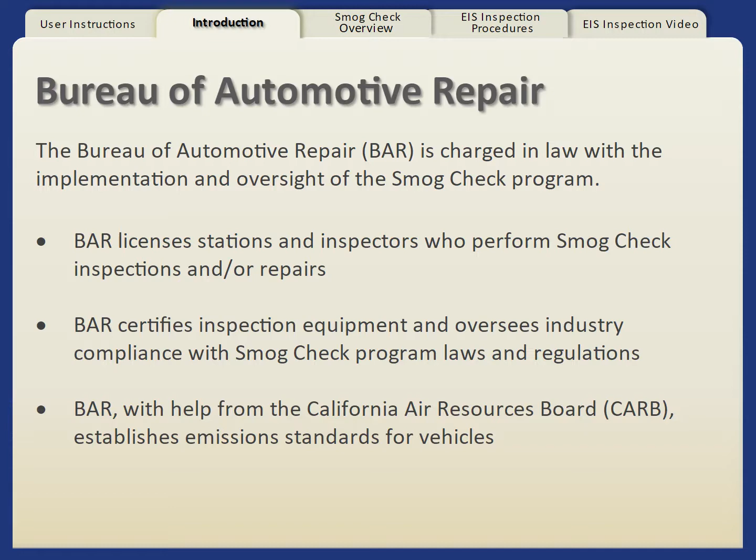BAR establishes emissions standards, also known as pass-fail cut points, for vehicles. The Smog Check program has greatly reduced the amount of air pollution created by tens of millions of cars in California.

According to the Air Resources Board, the program removes approximately 400 tons of smog-forming pollutants from California's air every day. The word smog is derived from two words, smoke and fog.

Smog is generally produced from vehicular and industrial emissions. Photochemical smog is the result of the chemical reaction of sunlight, nitrogen oxides, and volatile organic compounds in the atmosphere and results in poor air quality.

Ozone is formed by hydrocarbons, which is raw fuel from a vehicle tailpipe or fuel tank leakage, and nitrogen oxides, which are contained in vehicle tailpipe emissions undergoing a chemical reaction aided by the sun.

Ozone can irritate the respiratory system by aggravating asthma, inflaming and damaging the lining of the lungs, and reducing lung functions. Ozone is also known to aggravate chronic lung diseases, such as emphysema and bronchitis.

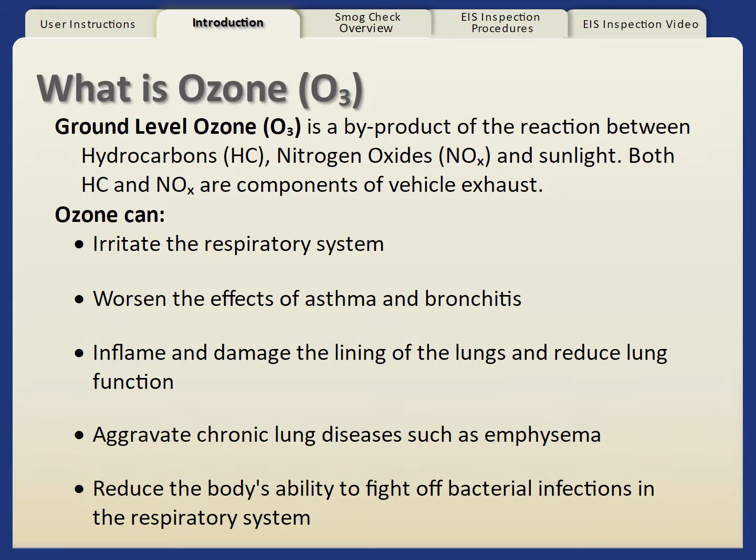Studies suggest that ozone may also reduce the body's ability to fight off bacterial infections in the respiratory system. Despite significant success in reducing overall pollution levels, air monitoring shows that over 90% of Californians breathe unhealthy levels of one or more air pollutants during some part of the year.

Health-based ambient air quality standards set by the Air Resources Board identify outdoor pollutant levels that are considered safe for the public, including those most at risk from exposure to air pollution, such as children, the elderly, and people who are active outdoors.

In setting air quality standards, the Air Resources Board has identified certain air pollutants as toxic air contaminants. Long-term exposure to toxins may have serious effects, such as cancer, even when exposure is low.

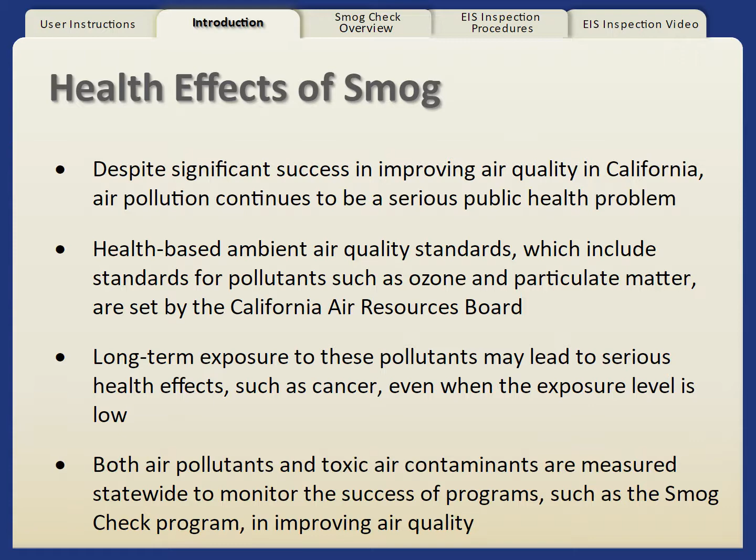Both traditional pollutants and toxic air contaminants are measured statewide to assess the success of programs for improving air quality. While there are numerous and varied contributors to California's air pollution, nearly half is from motor vehicles.

Hydrocarbon emissions from a vehicle come from unburned fuel. High levels of hydrocarbon emissions indicate incomplete combustion, which can be the result of low engine compression. If high enough, this could result in a failed smog check inspection.

Carbon monoxide is a colorless, odorless gas that is fatal to many life forms in moderate concentrations. Carbon monoxide emissions are often the byproduct of an overly rich fuel mixture. Unhealthy levels of carbon monoxide emissions result in a vehicle failing its smog check inspection.

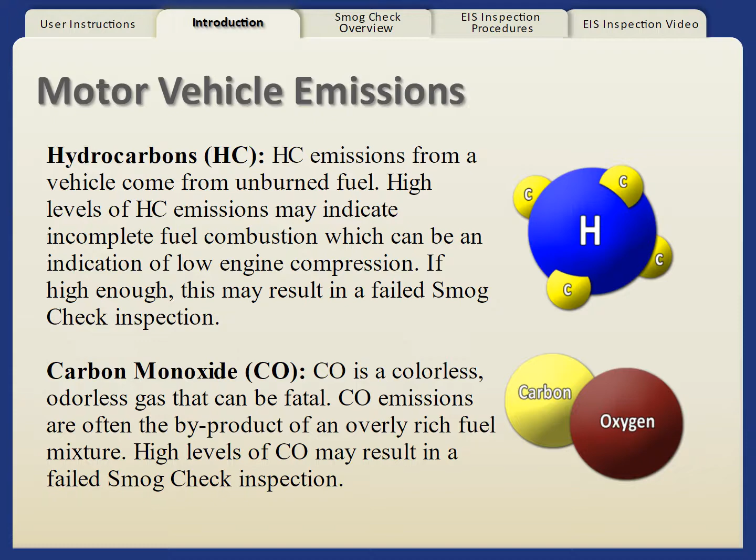Nitrogen oxides is an odorless gas that helps create smog, giving smog its characteristic brown color. Nitrogen oxide is produced when the temperature in the combustion chamber exceeds 2,500 degrees.

Excessive combustion chamber temperature could be caused by a lean mixture, advanced ignition timing, carbon buildup, a malfunctioning exhaust gas recirculation system, or a malfunctioning coolant system. High levels of nitrogen oxide emissions result in a vehicle failing its smog check inspection.

This section discusses the requirements of the Smog Check program. Here is a list of topics that will be covered: vehicles subject to Smog Check program, Smog Check program areas,

when is a smog check required, licensed inspector requirements, licensed station requirements, smog check station types, and inspection requirements by program area.

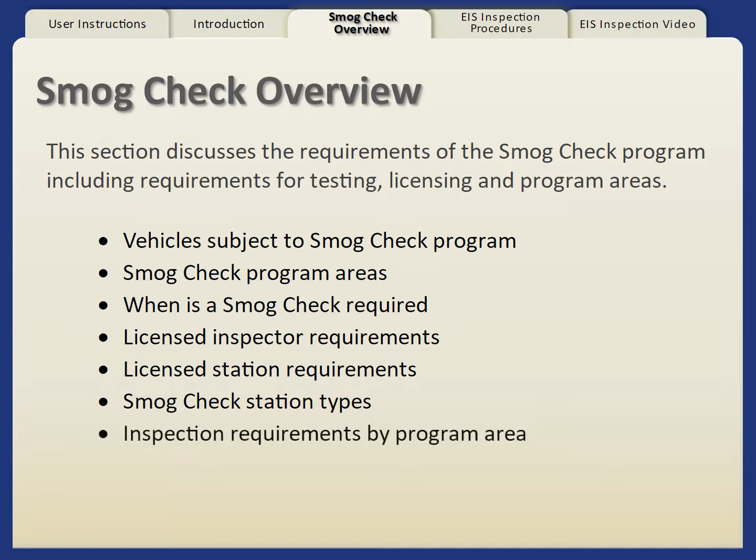Vehicles subject to the smog check program include gasoline vehicles 1976 and newer. This includes alternative fueled vehicles under 14,000 pounds, diesel vehicles 1998 and newer under 14,000 pounds, and hybrid vehicles 2000 and newer.

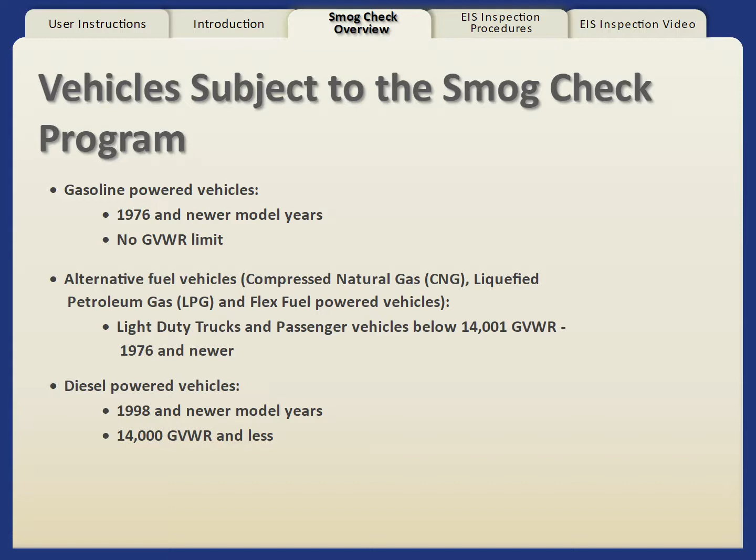The Smog Check program divides California into three areas. Vehicles registered in enhanced areas must receive an applicable BAR OBD inspection system test, also known as a BAR OIS test, or an acceleration simulation mode or ASM smog check, unless the vehicle is not compatible.

Also, a portion of the vehicles in these areas are required to pass a smog check inspection and obtain a certification from a STAR Test and Repair or STAR Test Only station.

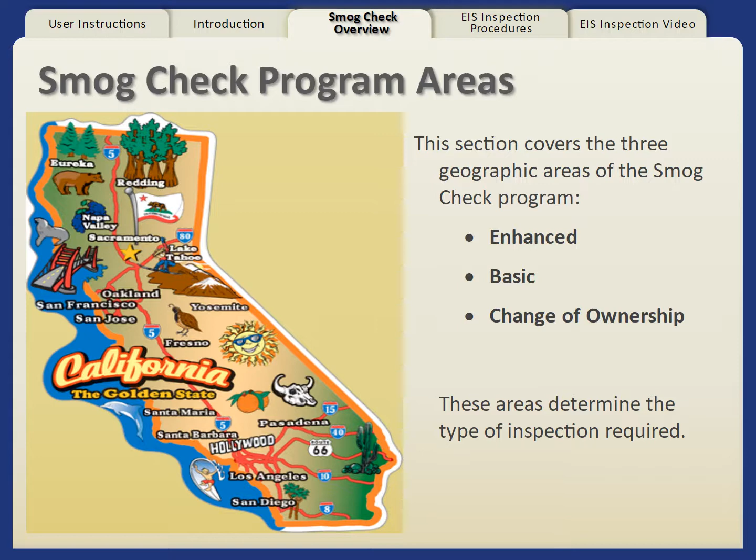Vehicles registered in basic or change of ownership areas must receive an applicable BAR OIS test or two-speed idle smog check. Vehicles in enhanced and basic areas are required to be smogged every other year as part of their registration

renewal for vehicles that are 8 model years or older. Keep in mind that the 8 model year exemption does not apply to diesel-powered vehicles.

Upon change of ownership of vehicles that are more than 4 model years old, keep in mind that the 4 model year change of ownership exemption does not apply to diesel-powered vehicles, and upon initial registration of a vehicle in California.

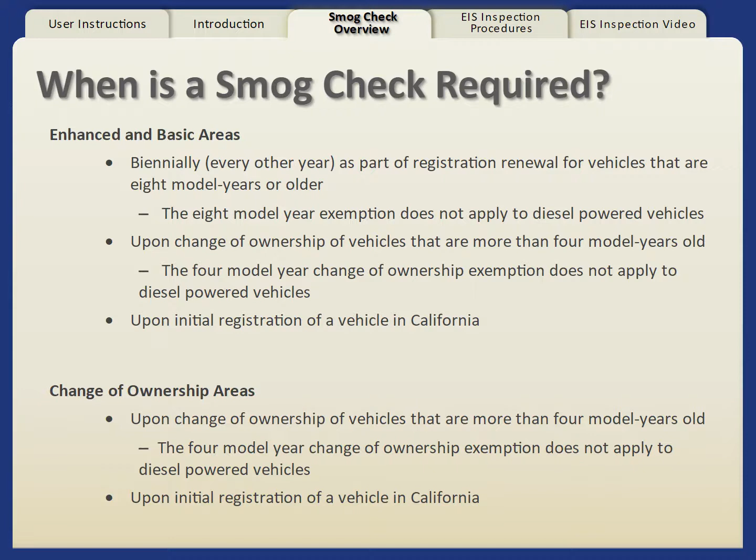In change of ownership areas, you are required to smog your vehicle upon change of ownership if that vehicle is more than 4 model years old. Keep in mind that the 4 model year change of ownership exemption does not apply to diesel-powered vehicles, as well as upon initial registration of a vehicle into California.

To become a licensed smog check inspector, the candidate must meet certain experience and training requirements and pass a BAR licensing examination. Licenses must be renewed every 2 years. Maintaining a current license requires successful completion of a BAR-approved continuing education class.

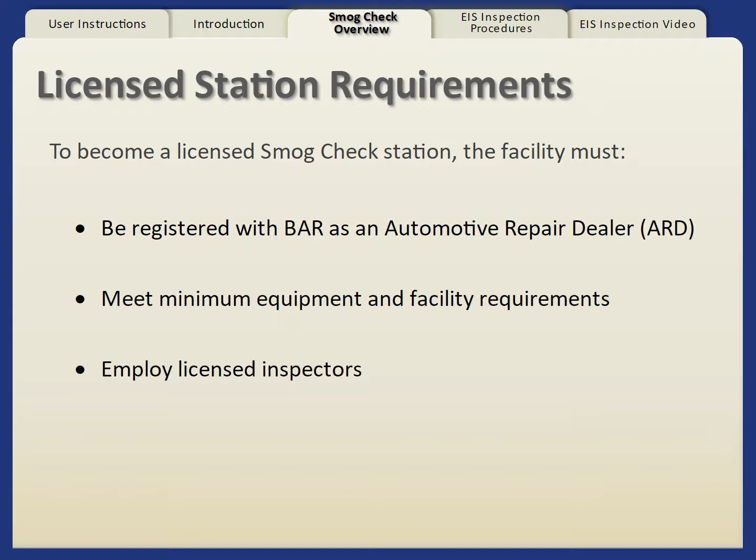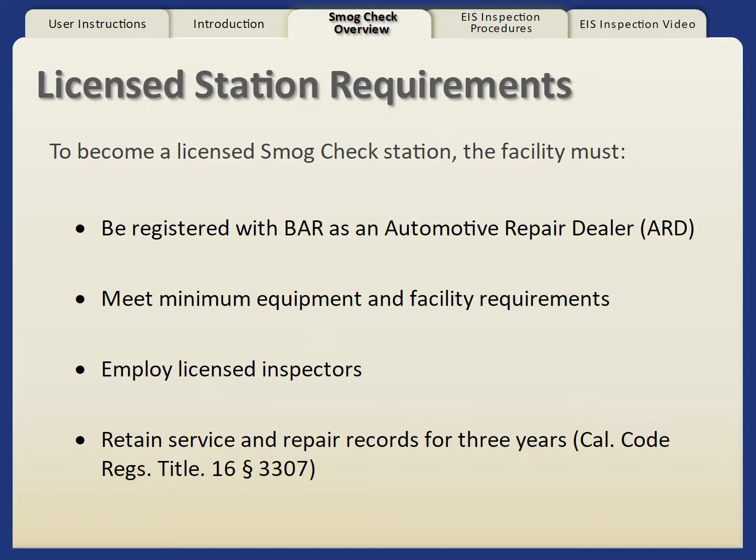To become a licensed smog check facility, the station must first be registered with BAR as an automotive repair dealer. The station must also meet minimum equipment and facility requirements while employing licensed smog check inspectors. The station must also keep necessary service and repair records for a minimum of 3 years, in accordance with Title 16, California Code of Regulations, Section 3307.

Test-only stations are licensed by BAR to test vehicles. They cannot perform any repairs. Directed vehicles and gross polluters must be certified by a STAR Test Only or STAR Test and Repair station. STAR Test and Repair stations that have met certain performance criteria will be able to test and certify all vehicles, including directed vehicles and gross polluters. They also perform repair assistance services under BAR's Consumer Assistance Program, or CAP.

Repair-only stations are licensed to perform diagnosis and repairs on most vehicles. They cannot perform any smog check tests.

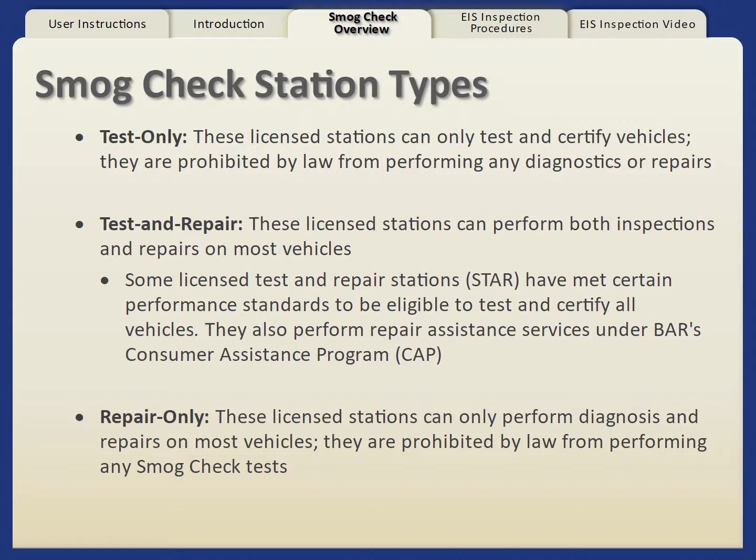In enhanced areas, most vehicles are required to be certified every 2 years during their DMV registration renewal process. Upon change of ownership or initial registration in California, all vehicles more than 4 years old are required to obtain a smog check inspection. A portion of vehicles in enhanced areas are required to obtain a smog check certificate from a STAR Test Only or STAR Test and Repair station.

Vehicles registered in enhanced areas must receive an applicable BAR OBD inspection system test, also known as a BAR OIS test, or an emissions test using a dynamometer, unless the vehicle cannot be tested on this equipment. Exceptions include all-wheel drive vehicles and those with non-disengageable traction control.

In basic areas, vehicles are required to be certified every 2 years during their DMV registration renewal process, and on change of ownership and upon initial registration in California. Vehicles registered in a basic area are not required to have an emissions test on a dynamometer. Instead, these vehicles are given an applicable BAR OIS test or two-speed idle emissions test.

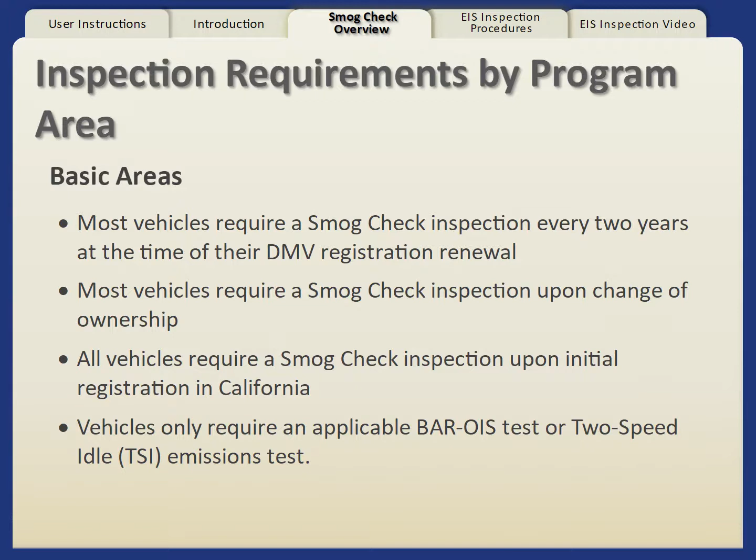In change of ownership areas, vehicles are required to be certified only upon change of ownership or on initial registration in California. Vehicles registered in a change of ownership area receive an applicable BAR OIS test or two-speed idle emissions test.

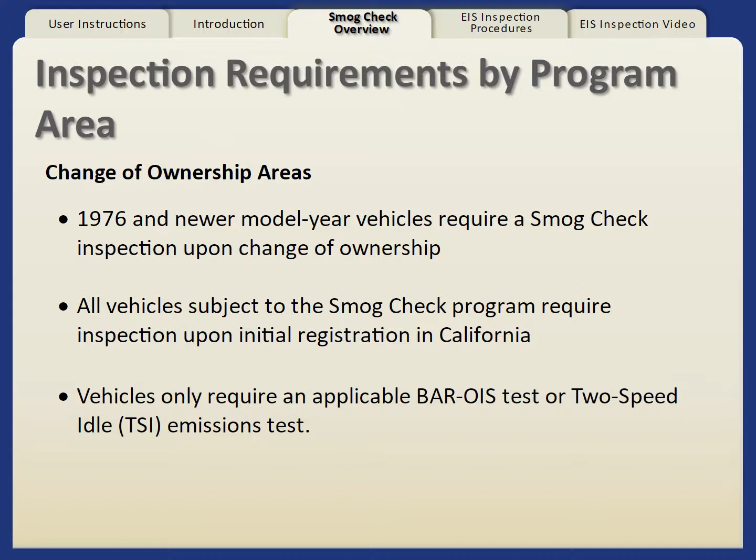The remainder of this training module will cover the smog check inspection process. Here is a list of topics that will be covered during this section: vehicle verification, smog check inspection elements, overview of smog check procedures, and reporting smog check results.

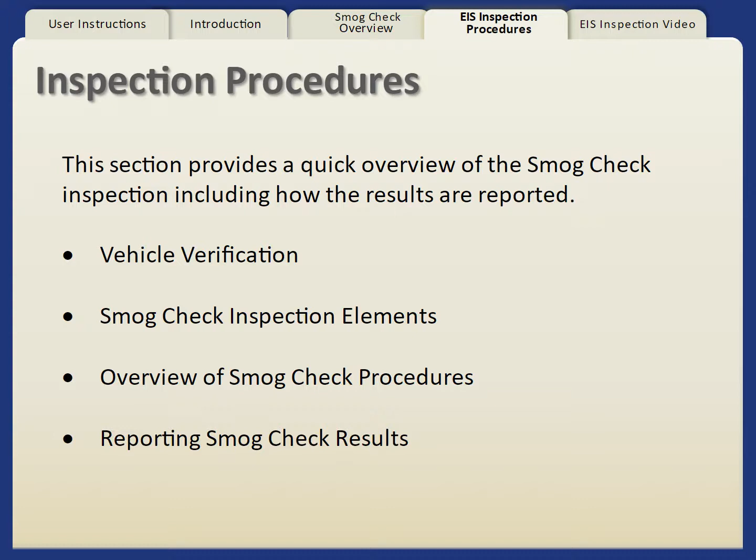A BAR licensed smog check inspector verifies that the vehicle matches the registration renewal form and scans the information into the inspection system. The inspection system communicates with the vehicle information database to determine if the station is authorized to inspect the vehicle. Using a barcode scanner, the DMV registration renewal form will automatically enter information about the vehicle into the inspection system. If the inspection is for change of ownership, or if the consumer forgets their renewal form, the inspector must manually enter the vehicle identification information into the inspection system.

After entering in specific license information and a confidential access code, the inspector proceeds to the test mode of the inspection system. The inspector manually enters the vehicle information, engine size, transmission type, etc., at the inspection system screen prompts.

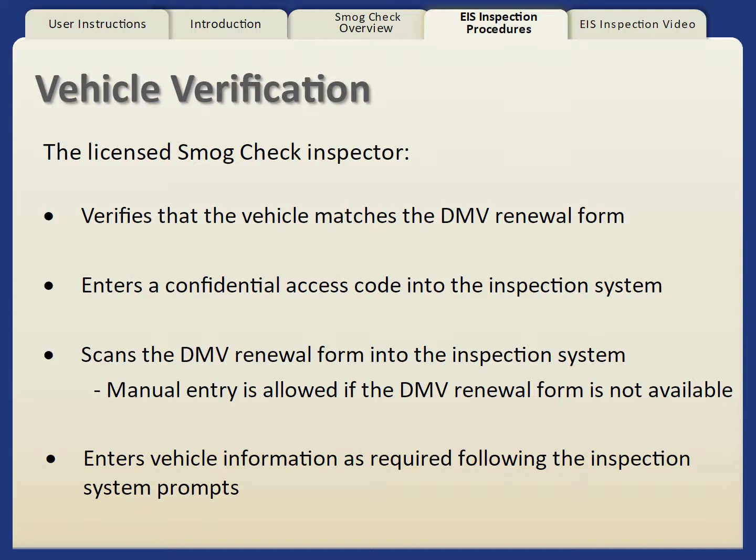The smog check inspection using the EIS is divided into three parts. The first part is a visual inspection, the second part is an emissions test, and the third is a functional test. Please note that these parts are the main components of a smog check inspection, but do not contain all information needed to conduct a smog check inspection. Please refer to the smog check manual for more specific information on inspection procedures.

The emissions inspection system reviews all data entered by the inspector and analyzes the tailpipe sampling results of the emissions test. Using electronically stored vehicle-specific parameters, the EIS determines if the vehicle passes or fails all required parts of the smog check inspection. The results of the test are transmitted to the state's vehicle information database.

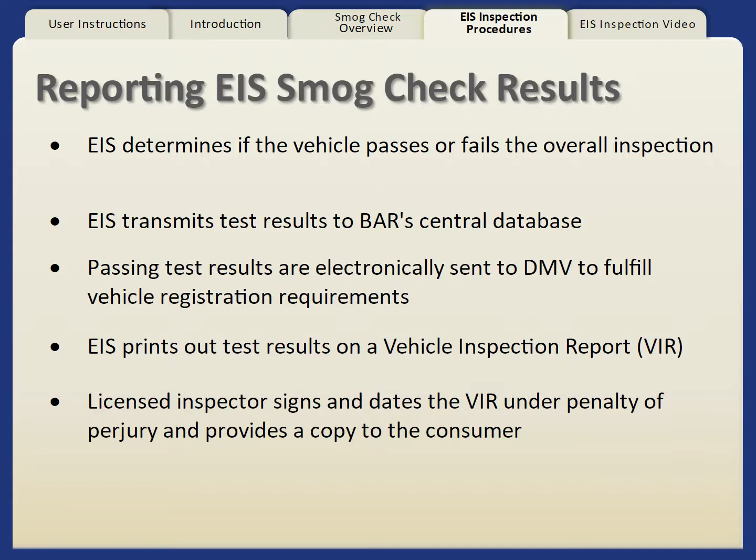If the vehicle passes the test, the results are electronically sent to the DMV to meet registration requirements. After each test, whether the vehicle passes or fails, the emissions inspection system prints out the entire set of results on a vehicle inspection report, or VIR. The licensed inspector is required to sign and date under penalty of perjury a statement on the VIR indicating that the test was performed correctly, and give a copy to the consumer.

This video is intended to provide a basic understanding of the procedures involved in conducting ASM smog check inspections using a BAR-97 Emissions Inspection System, or EIS.

For the full procedures on all smog check testing, refer to the latest version of the smog check manual, which can be obtained from BAR's website at www.smogcheck.ca.gov.

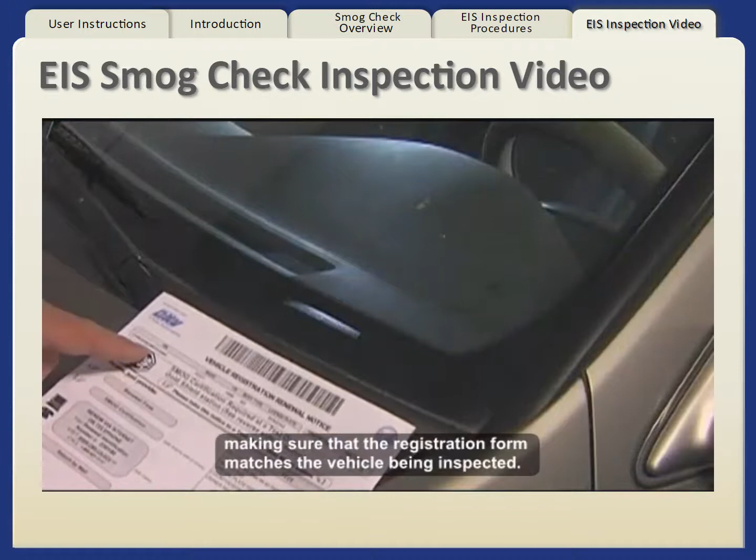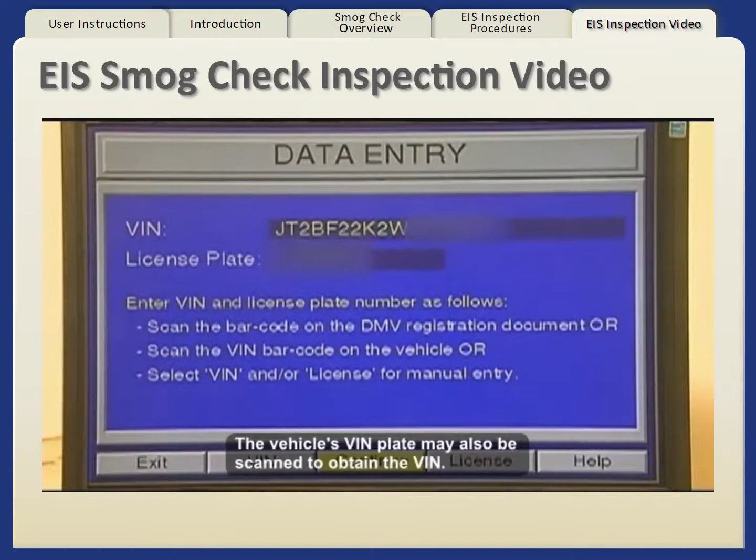The inspector begins by selecting smog check mode on the EIS. Inspectors must follow the EIS prompts to input all vehicle information. The inspector then uses the registration renewal form provided by the consumer to scan the vehicle information into the emissions analyzer, making sure that the registration form matches the vehicle being inspected. If no renewal form is provided, the inspector can manually enter the vehicle identification and license plate numbers. The vehicle's VIN plate may also be scanned to obtain the VIN.

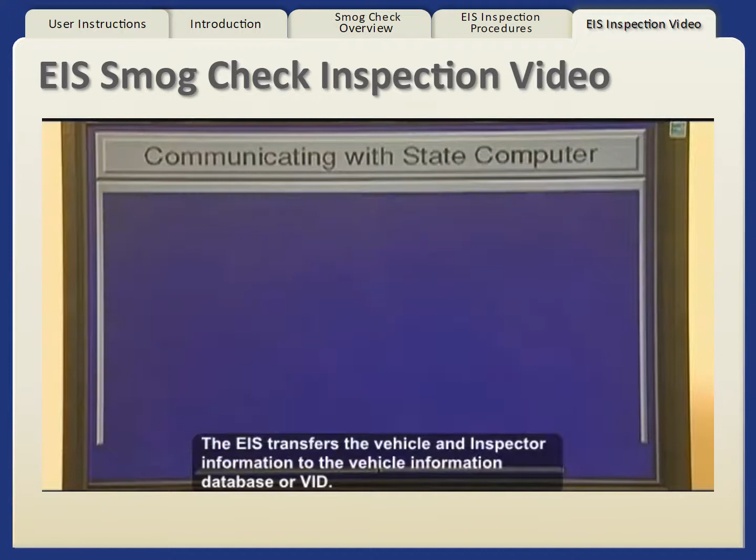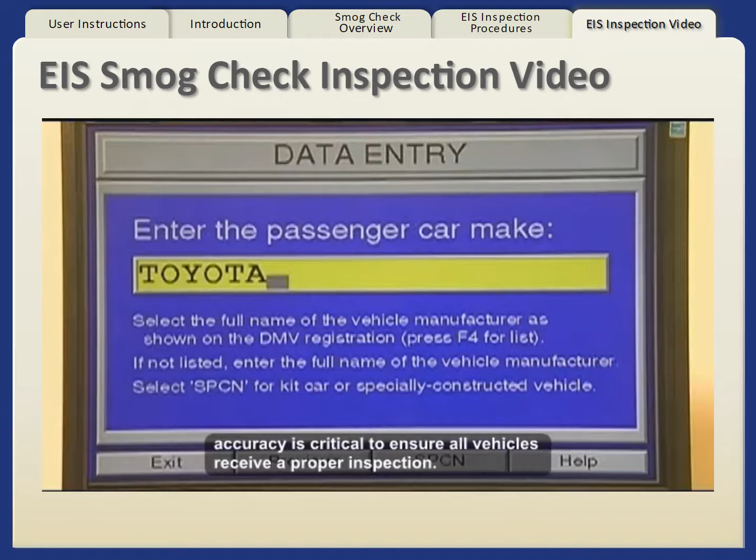The EIS transfers the vehicle and inspector information to the Vehicle Information Database, or VID. Entry of vehicle specifications is the next step in the process. During this step, as well as all other steps, accuracy is critical to ensure all vehicles receive a proper inspection.

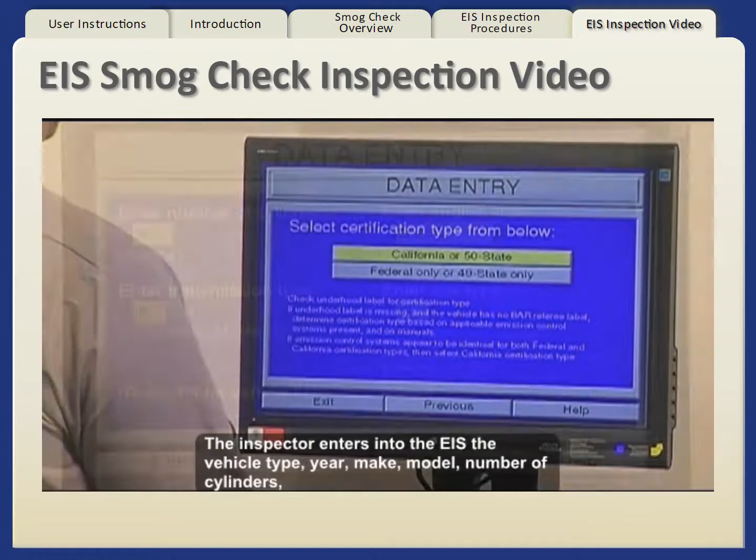Some data entered during the smog test cannot be re-entered, and if entered incorrectly, the smog test will have to be aborted and started again. It is unlawful for an inspector to enter information from a vehicle other than the one that is currently being tested. The inspector enters into the EIS the vehicle type, year, make, model, number of cylinders, fuel type, emissions certification type, transmission, odometer mileage, exhaust configuration, and gross vehicle weight rating for trucks.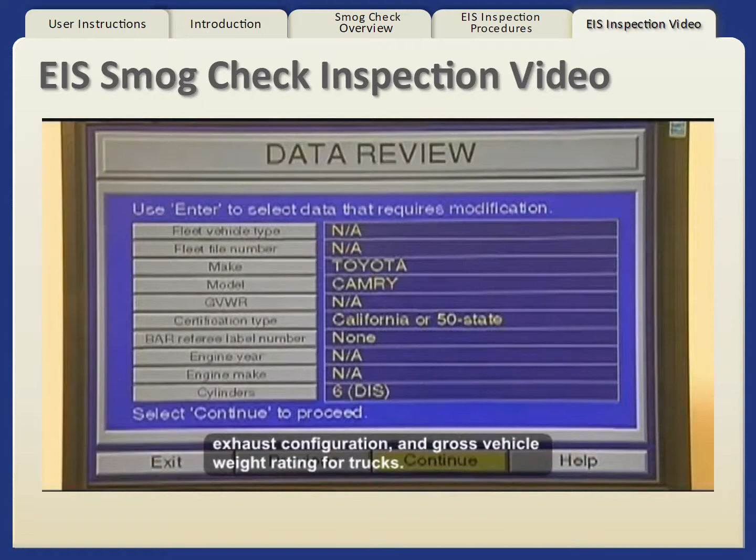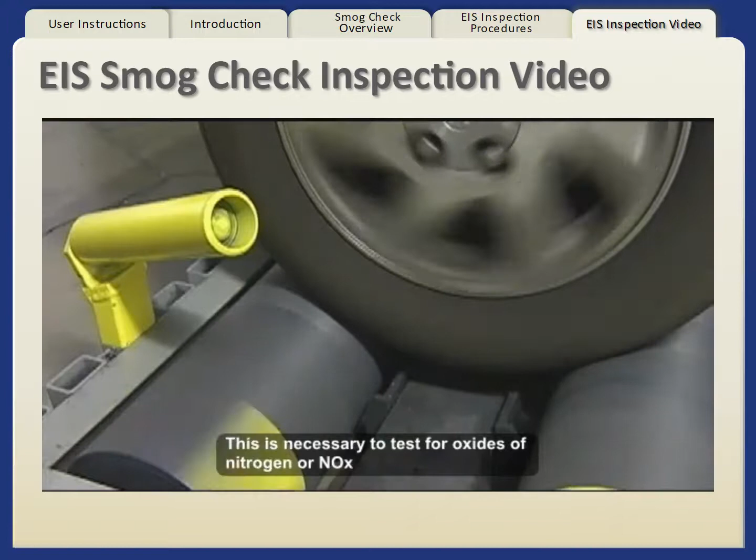The next step is preparing the vehicle for an acceleration simulation mode, or ASM, emissions test using a two-wheel drive dynamometer. The dynamometer simulates driving conditions by applying resistance to the wheels. This is necessary to test for oxides of nitrogen, or NOx, which is primarily produced when the vehicle is under a load. The inspector must follow the EIS prompts to determine if the vehicle can be tested on the dynamometer.

Be aware that some vehicles' designs are incompatible with a two-wheel drive dynamometer. Any attempt to operate such vehicles on a two-wheel dynamometer could cause damage to the vehicle or test equipment. Incompatible vehicles include, but are not limited to, vehicles equipped with non-disengageable traction control, full-time four-wheel drive, all-wheel drive, and vehicles that are too large or too heavy to be safely operated on a dynamometer.

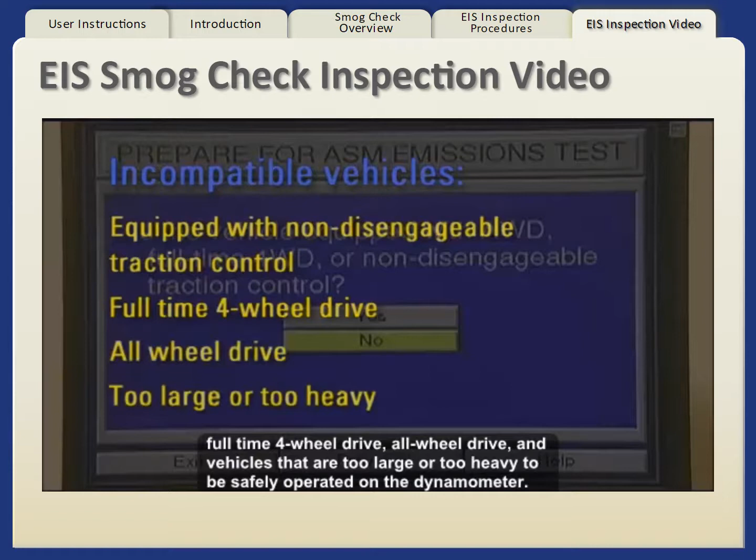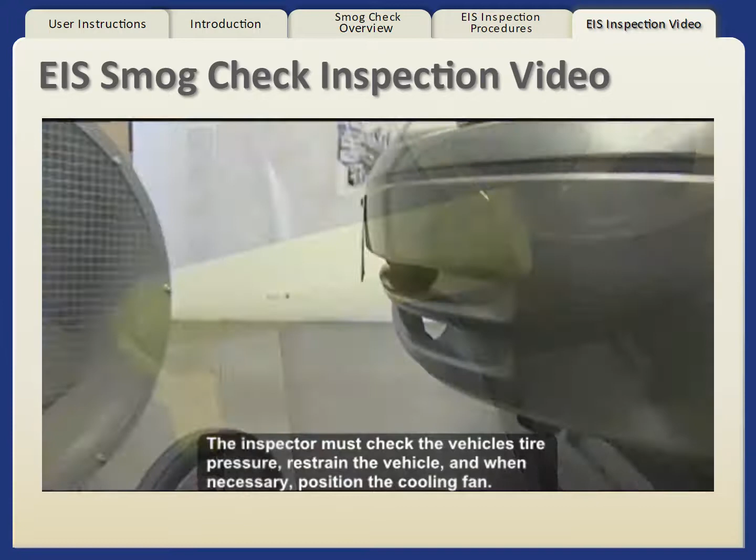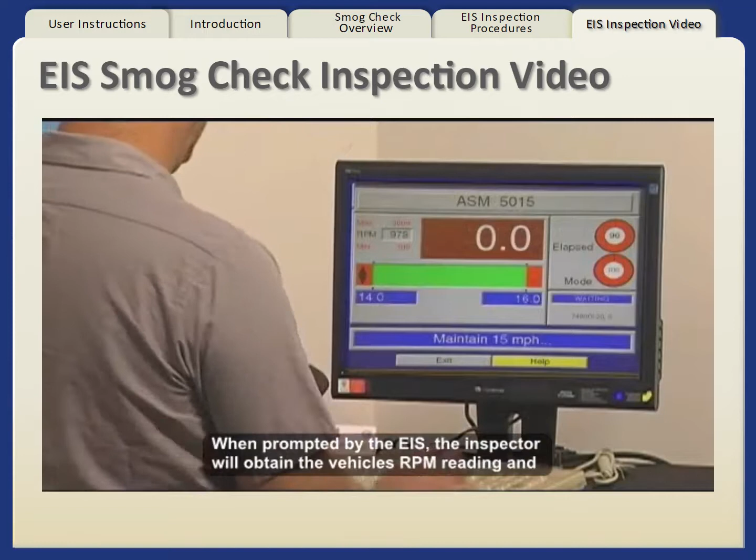The inspector must check the vehicle's tire pressure, restrain the vehicle, and when necessary, position the cooling fan. The cooling fan must be used when the ambient temperature reaches 72 degrees or above. When prompted by the EIS, the inspector will obtain the vehicle's RPM reading and insert the analyzer probe into the vehicle's tailpipe. While performing an ASM test, the inspector operates the vehicle at 15 miles per hour.

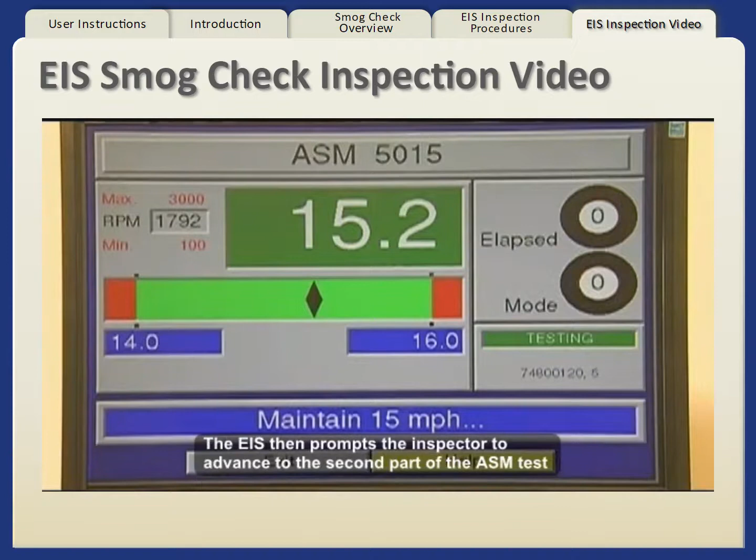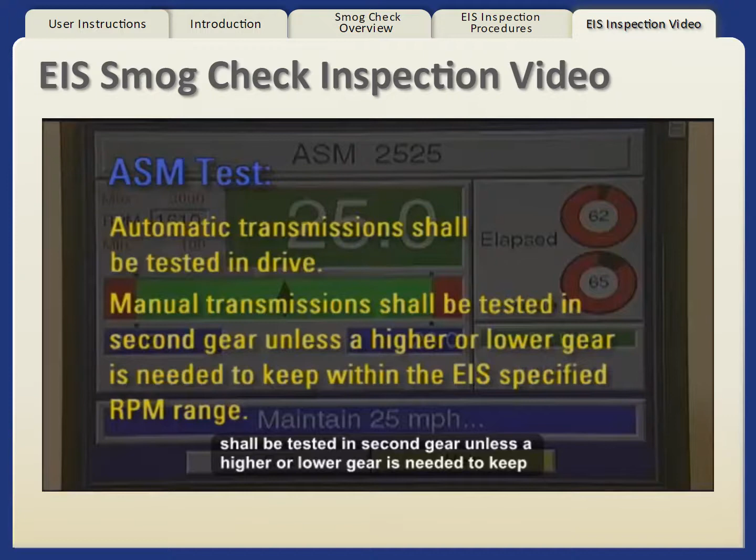The EIS then prompts the inspector to advance to the second part of the ASM test, in which the vehicle is operated at 25 miles per hour. The proper gear selection must be applied to receive the correct emission test results. Automatic transmission shall be tested in drive, and manual transmission shall be tested in second gear unless a higher or lower gear is needed to keep within the EIS specified RPM range.

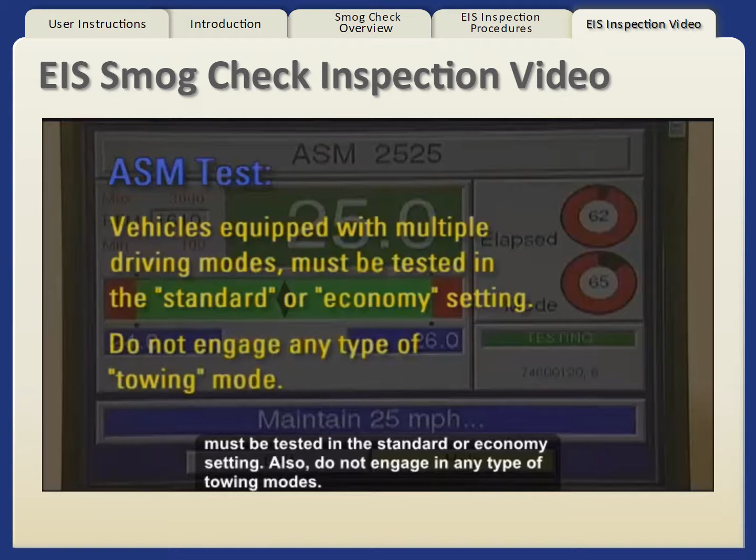Vehicles equipped with multiple driving modes, for example, low traction, performance, or sport, must be tested in the standard or economy setting. Also, do not engage any type of towing modes. Note that aborts which occur after beginning an ASM test can affect the station's star score.

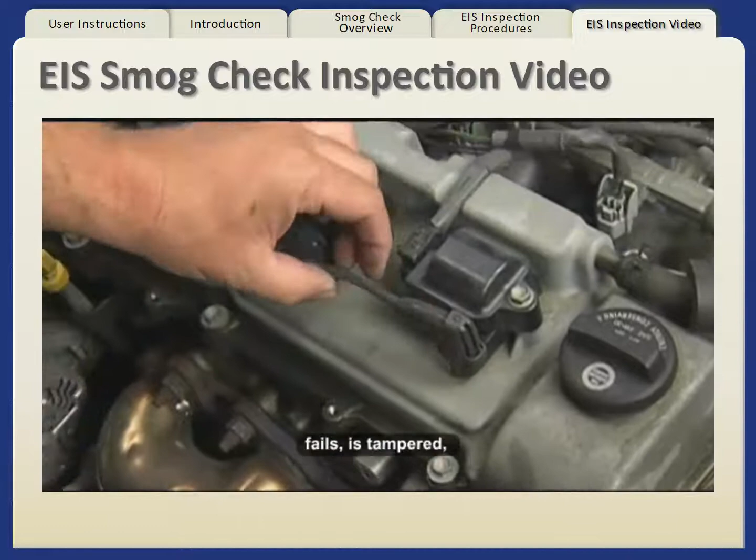During the visual inspection, the inspector identifies each emissions component required to be on the vehicle and makes sure that all components are properly connected. Refer to the Smog Check manual to determine if an emissions control component passes, fails, is tampered, missing, modified, disconnected, defective, non-applicable, or requires an executive order, or EO, from the California Air Resources Board.

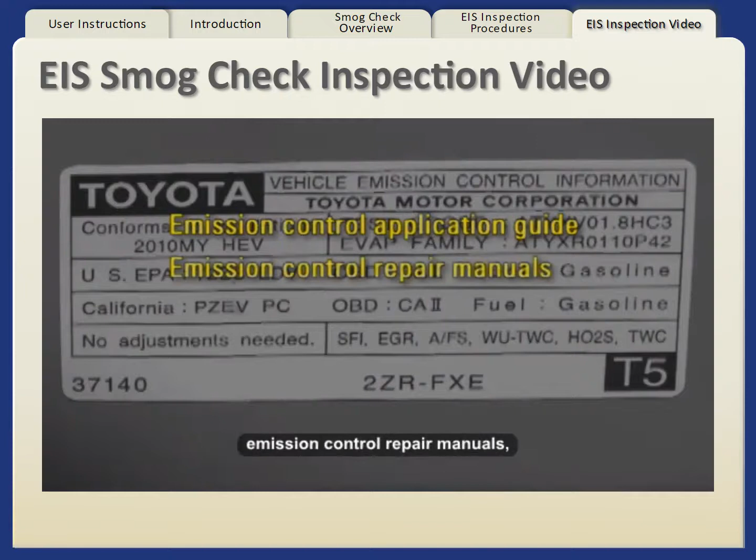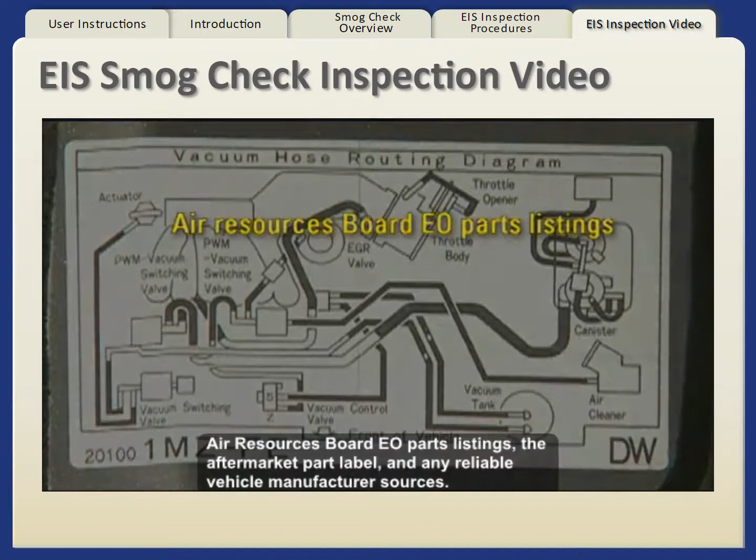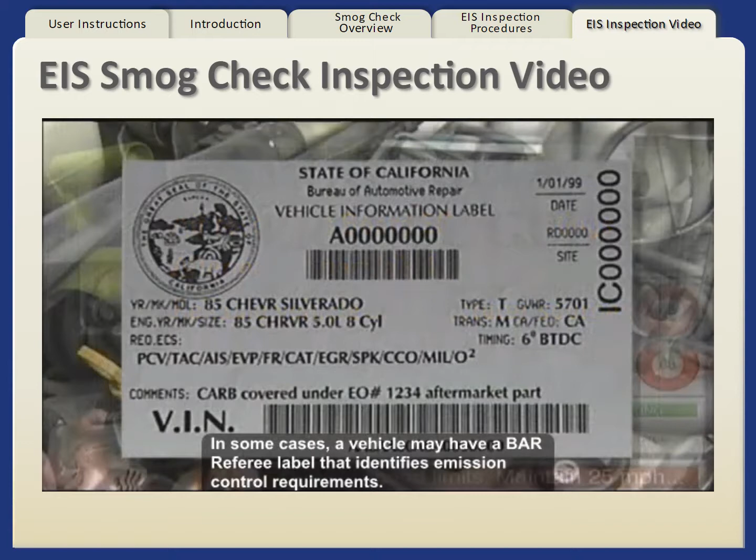Inspectors must use all available information necessary to determine the vehicle's emission control requirements, including but not limited to the underhood emission control label, a current emission control application guide, emission control repair manuals, emission component location guides, manufacturer emission control recalls, vacuum hose routing diagrams, Air Resources Board EO parts listings, the aftermarket part label, and any reliable vehicle manufacturer sources. In some cases, a vehicle may have a BAR Referee label that identifies emission control requirements.

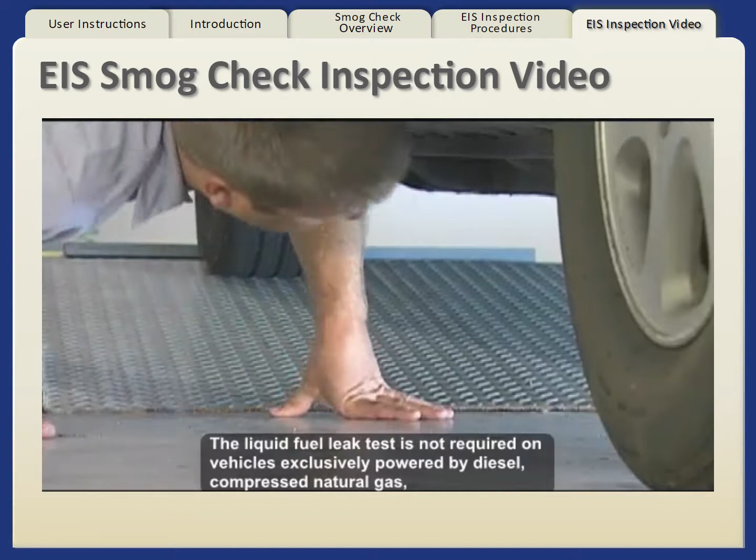The liquid fuel leak test is not required on vehicles exclusively powered by diesel, compressed natural gas, liquefied natural gas, or liquefied petroleum gas. The purpose of this inspection is to determine if there is fuel coming from the vehicle's fuel delivery, metering, or evaporation systems.

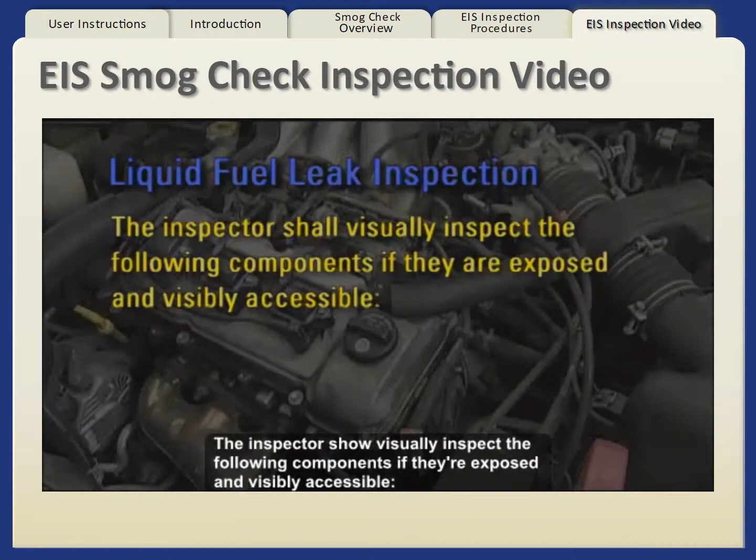A visible drop or puddle shall constitute a failure. The liquid fuel leak inspection shall be conducted with the engine running. Use extreme caution when working around moving parts and ensure the transmission is in park or neutral with the parking brake on.

The inspector shall visually inspect the following components if they are exposed and visibly accessible: gasoline fuel tanks, external fuel pumps, carburetors, charcoal canisters, fuel injectors, fuel delivery and return lines, gasoline fill pipes and associated hoses, tanks, connections, any valves connected to any other fuel evaporative component, fuel caps, fuel vapor hoses, fuel pressure regulators, and fuel filters.

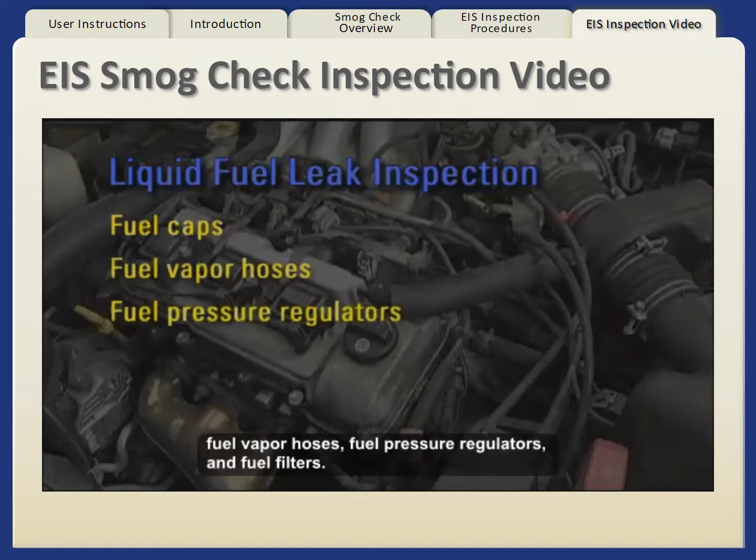An inspector may refuse to inspect a vehicle or may abort an inspection if a liquid fuel leak presents a safety hazard. If no liquid fuel leak is found, the vehicle shall pass this portion of the inspection, and the inspector shall enter P for pass at the fuel leak's prompt.

If a liquid fuel leak is detected, the inspector shall enter F for defective into the EIS fuel leaks prompt. Inspectors must indicate on the Vehicle Inspection Report, or VIR, the location of any liquid fuel leak.

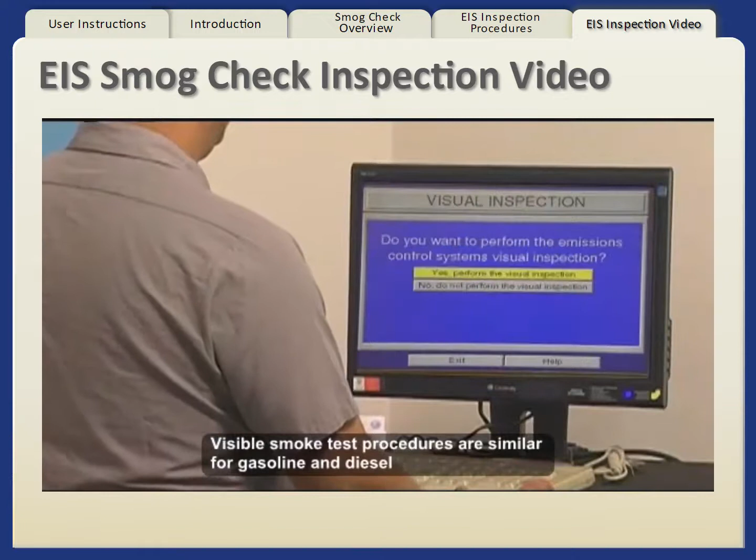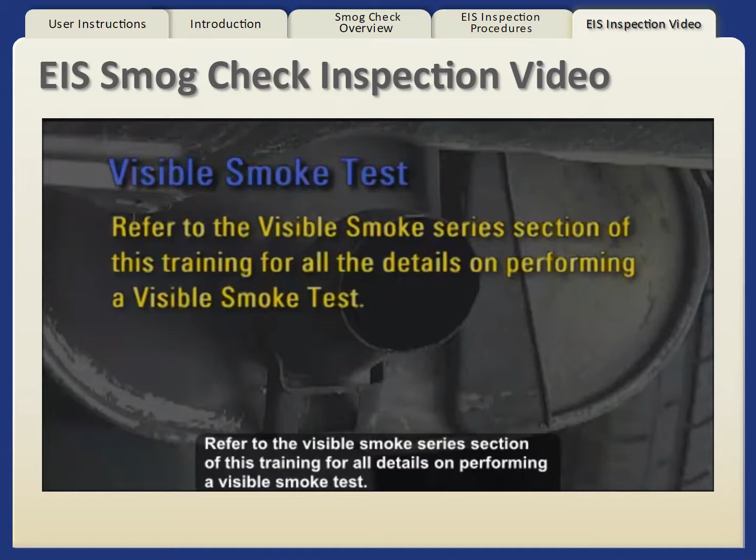Visible smoke test procedures are similar for gasoline and diesel, except when the bar snap tests are performed during the smog check inspection and the pass-fail standards are different. Refer to the Visible Smoke Series section of this training for all details on performing a visible smoke test.

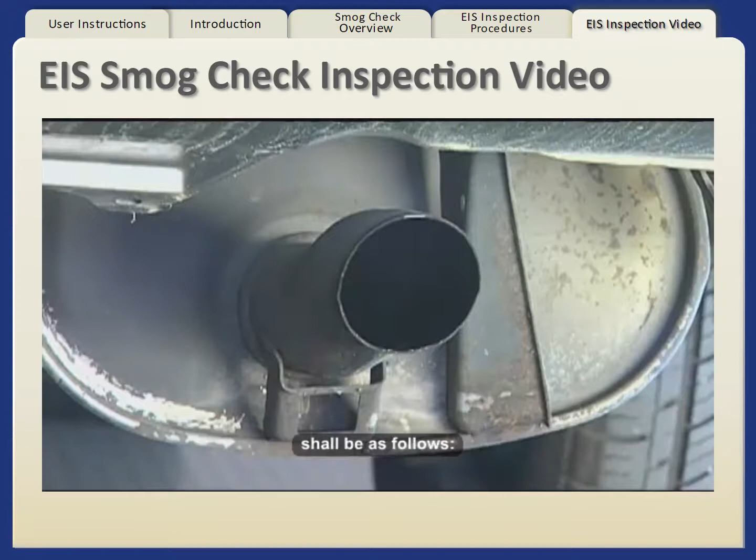The conditions and procedures for performing a visible smoke test for gasoline vehicles and recording the results shall be as follows. Idle test: observe the tailpipe exhaust plume of the vehicle for 10 seconds. Crankcase test: observe the engine crankcase for 10 seconds.

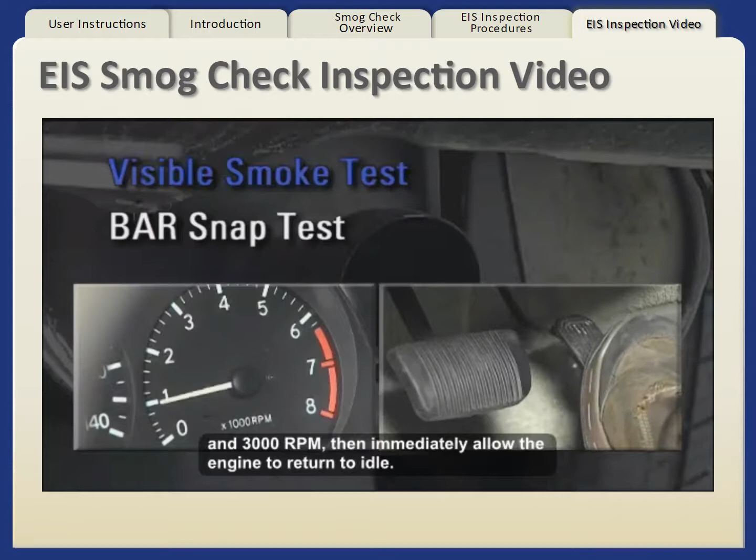Bar snap test: quickly push and release the accelerator pedal from the idle position to between 2,000 and 3,000 RPM, then immediately allow the engine to return to idle. Any smoke during either of the final two bar snap tests constitutes a failure. Steam shall not constitute a failure.

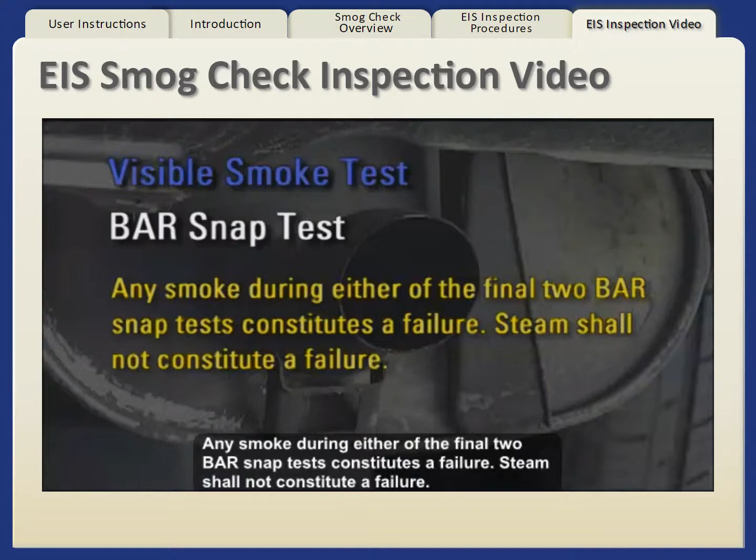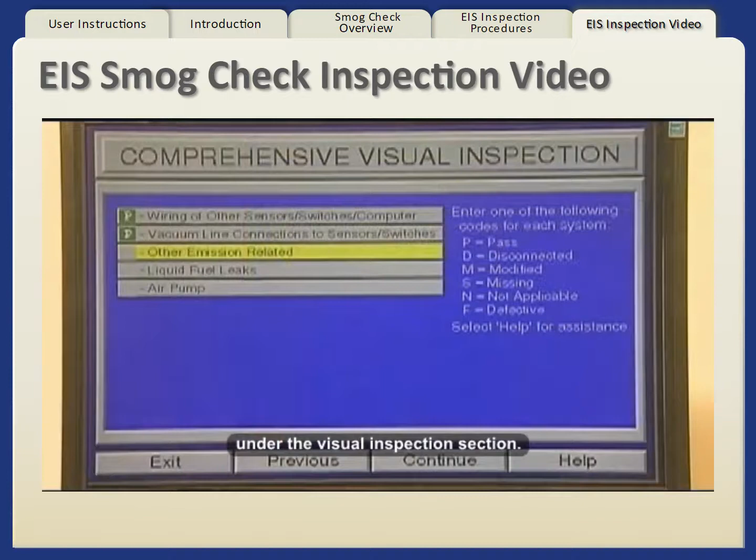Results must be entered into the EIS using the Other Emission-Related Controls category under the Visual Inspection section. If a vehicle fails any portion of the visible smoke test, enter F for defective into the EIS Other Emissions-Related category.

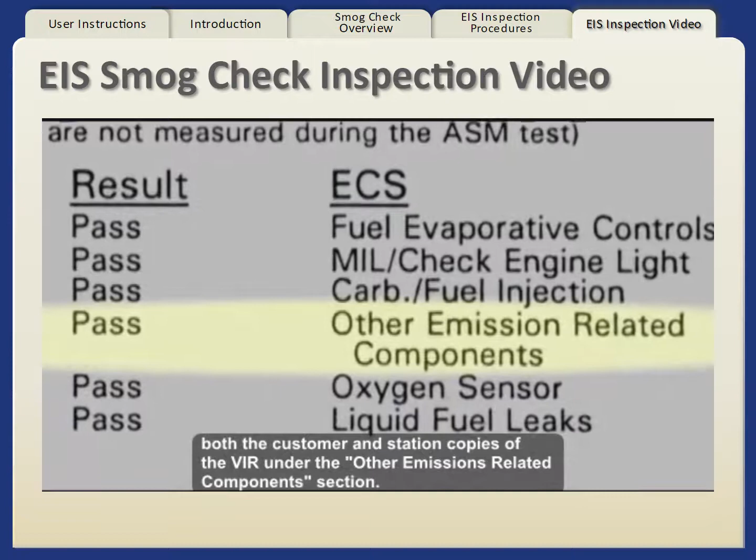If the vehicle fails the visible smoke test, the inspector shall document the failure on both the customer and station copies of the VIR under the Other Emissions-Related Components section. Clearly indicate the failure reason, such as failed visible smoke test or failed for visible smoke.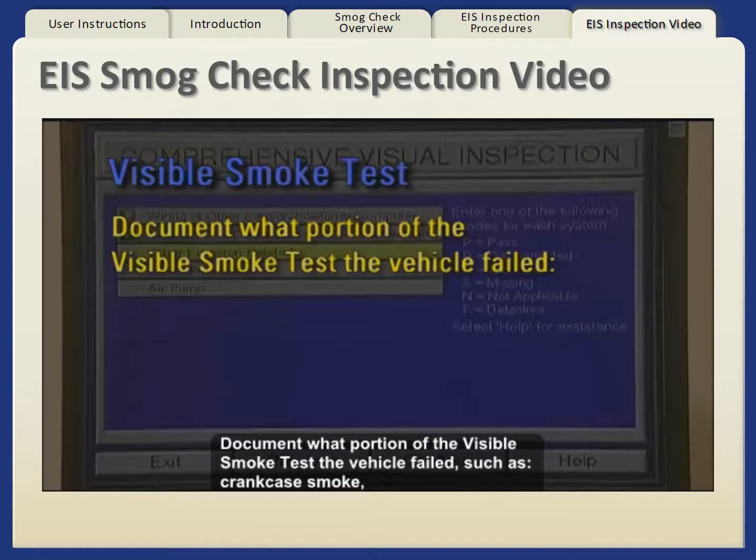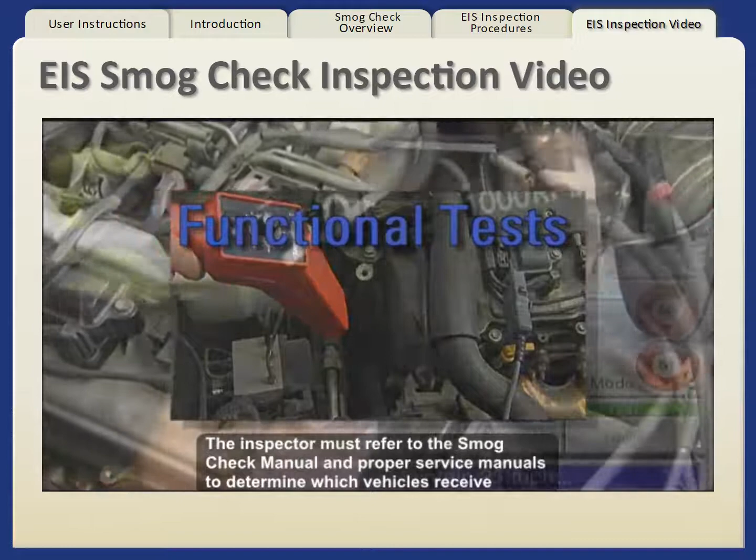Next, the inspector performs a series of functional tests that are applicable to the vehicle. The inspector must refer to the Smog Check Manual and proper service manuals to determine which vehicles receive certain tests and to properly complete the functional portion of the Smog Check inspection. Functional tests include ignition timing, malfunction indicator lamp, onboard diagnostics test, and the fuel cap pressure test.

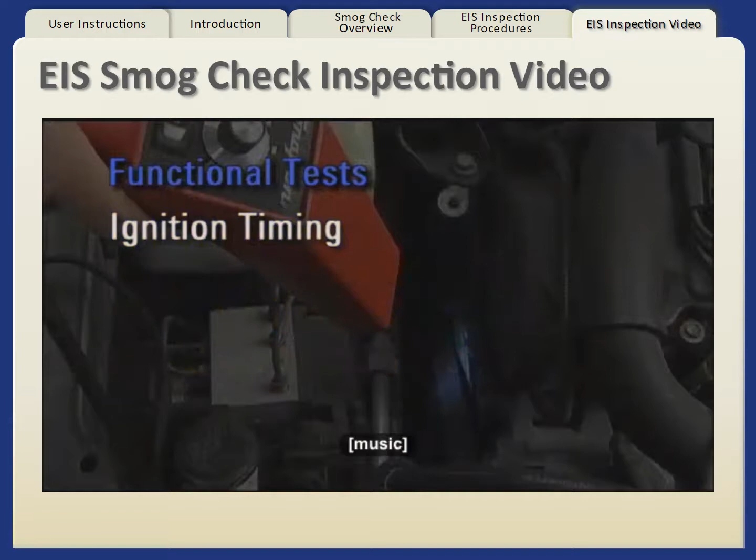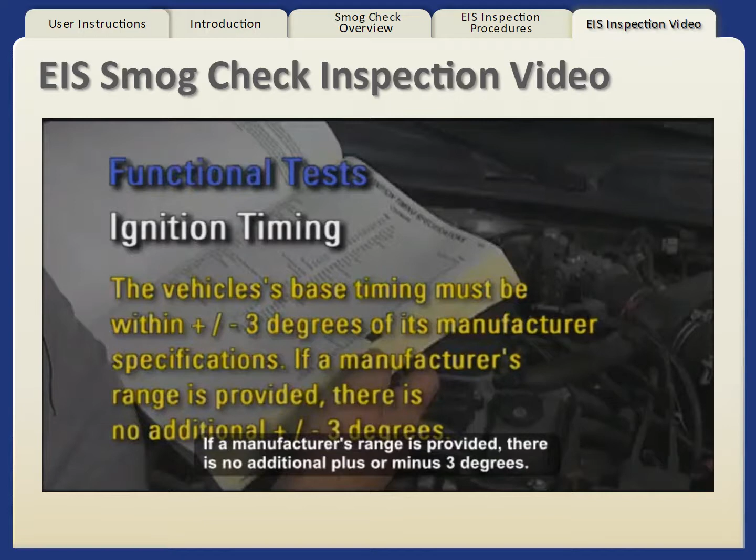The engine's ignition timing needs to be checked to ensure it's within the manufacturer's specified range. The vehicle's base timing must be within plus or minus 3 degrees of its manufacturer's specifications. If a manufacturer's range is provided, there is no additional plus or minus 3 degrees. This is accomplished by using a timing light to inspect the vehicle's base ignition timing according to the vehicle manufacturer's timing inspection procedure.

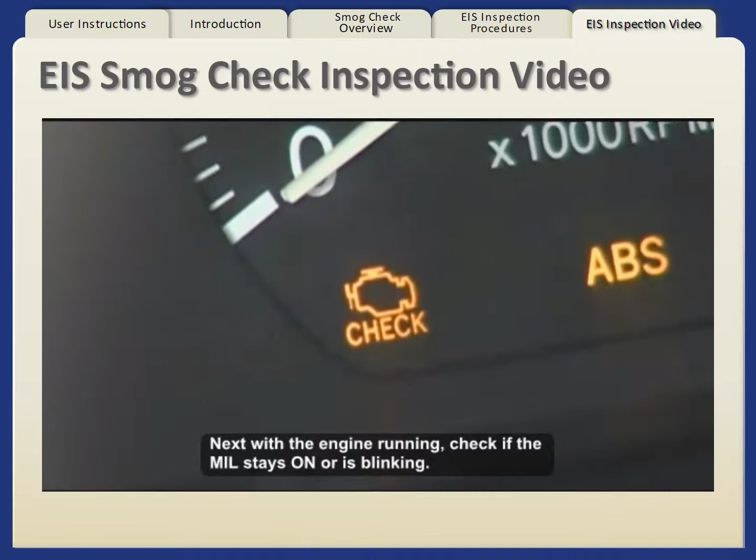During the malfunction indicator lamp, or MIL, test, the inspector first looks to see that the MIL on the dash of the vehicle is working properly. Next, with the engine running, check if the MIL stays on or is blinking. Either of these conditions will cause the vehicle to fail this portion of the test.

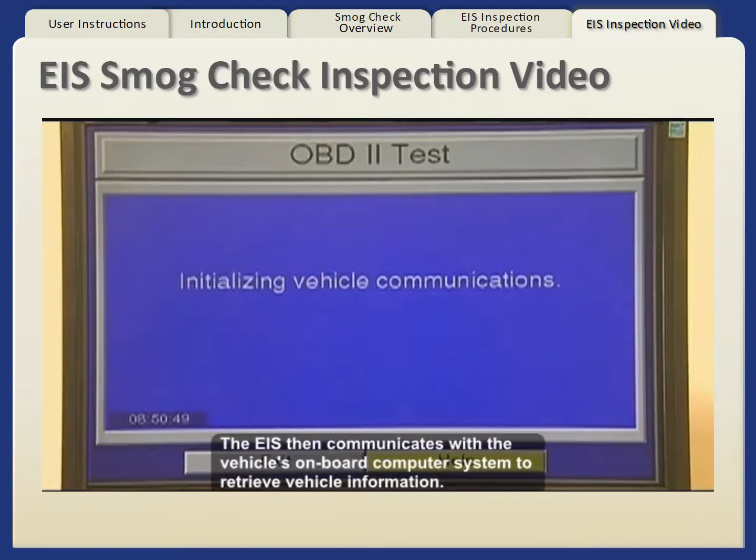The EIS has a cable that attaches to the data link connector, or DLC, on most 1996 and newer model year vehicles. The EIS then communicates with the vehicle's onboard computer system to retrieve vehicle information. The results are determined by the EIS.

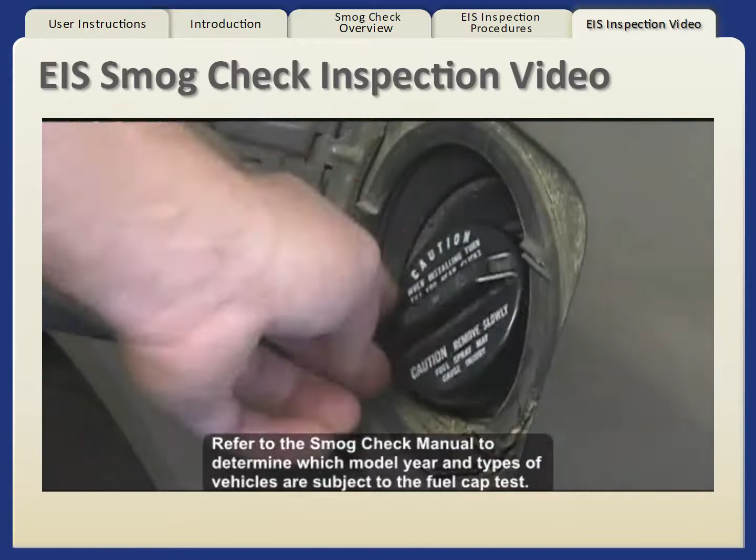Refer to the Smog Check Manual to determine which model year and types of vehicles are subject to the fuel cap test. The fuel cap tester is either part of or tethered to the EIS. After using the adapter guide to choose the appropriate adapter, the vehicle's fuel cap is secured to the tester in the same manner as it is to the vehicle. The cap is then tested and the results are determined by the EIS.

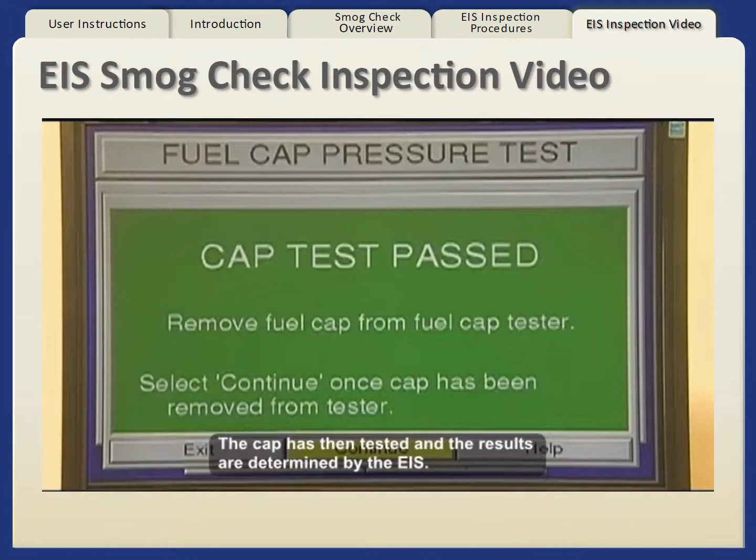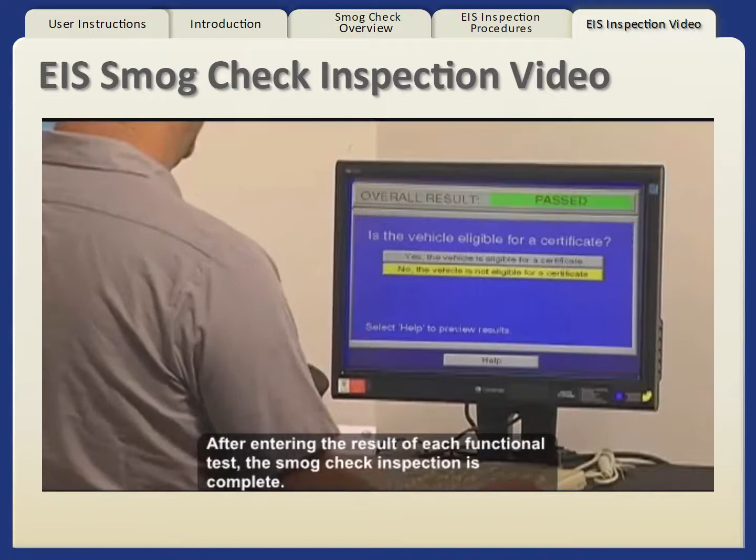After entering the result of each functional test, the smog check inspection is complete. The EIS will send the overall inspection results to the VID and print 2 copies of the VIR. Sign both copies and provide 1 copy of the VIR to the consumer and keep the other for your records.

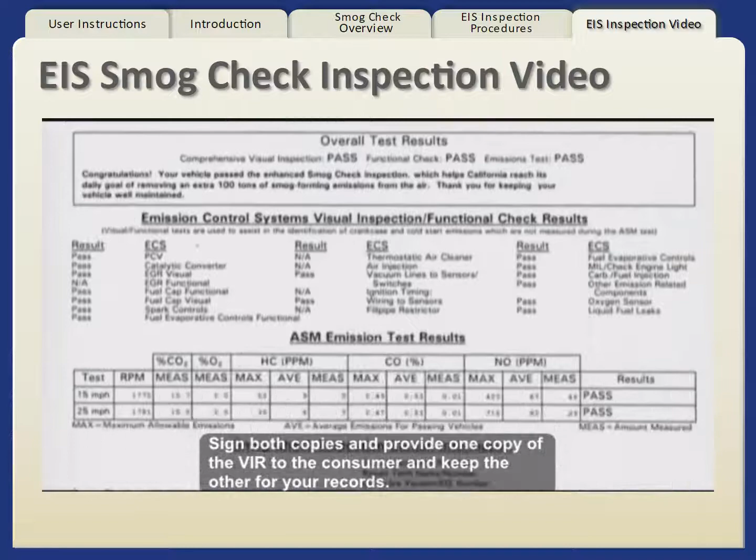For more information about the visible smoke test, low pressure fuel evaporative test, and the smog check program, please refer to www.smogcheck.ca.gov.